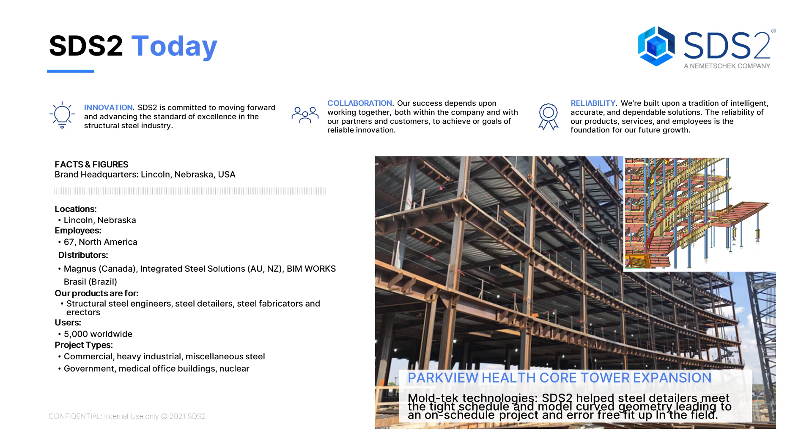Projects range from commercial to heavy industrial to miscellaneous steel. And you'll see that across government projects, medical office buildings, nuclear, churches, strip malls, and anything else your imagination can come up with. I feel like we've seen that come through on SDS2 projects that come through our solid steel competition.

One other thing I wanted to hit before we got into our webinar today is the ROI with SDS2. We recently did a survey of our customer base, and they brought back some pretty interesting details to us about how SDS2's impacted their business. Most of you have seen the ability to expand the capacity and take on more projects through your shops or through your detailing offices, or take on larger projects. Our customers also feel like they've got a competitive advantage when it comes to winning projects, which is great to see. And your customers as detailers and fabricators tend to be more satisfied with the quality and efficiency of your work. So I just wanted to share this with you guys so that you can see how SDS2 is helping bring more profitability to your bottom line.

Today, our webinar is going to focus on the Estimodeling and production workflows between SDS2 and Tekla EPM. What we work through will work with either our detailing product or our Estimodeling product. The Estimodeling product is really a use case for fabricators who maybe don't have a detailing license in-house, or are subbing out to detailers outside of their office, but want to do the Estimodeling workflow without needing a full detailing station. So the Estimodeling workflow can be facilitated by our Estimodeling product or by the detailing product. But when we get to the production workflows, you do need a detailing license to work through that. So with that, we'll jump into our Estimodeling workflow and product demonstration so you can see how this works start to finish between SDS2 and Tekla EPM.

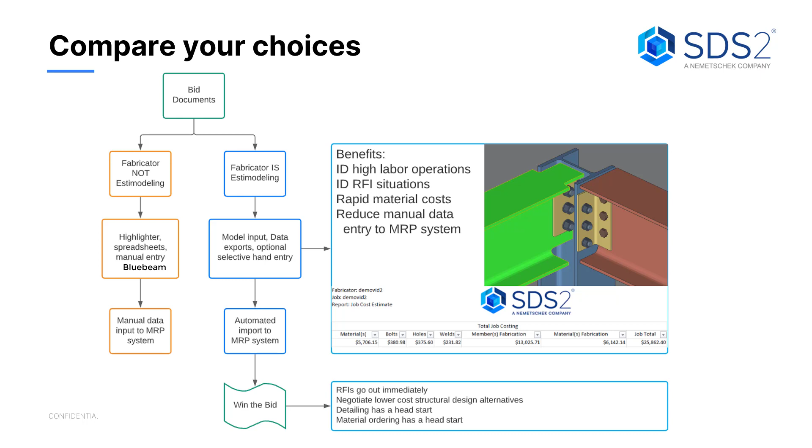So what that workflow looks like is importing a model or importing PDFs. If you import a PDF, you'll use that as a guide to trace members over on your different elevations and input columns and beams that way. From there, in SDS2, it's going to take care of the connection design automatically for you by designing realistic connections. The materials are going to get added as a part of that design, as will the cuts and copes and all the materials and welds.

From here, you can identify potential issues like looking for high labor situations, which could be non-square cut ends that maybe you can actually change to square cut ends to reduce some of that labor. It could be looking for web doublers or any other inefficiencies you might see in your model. And all this can be done fairly automatically within SDS2. There's no third-party software required here.

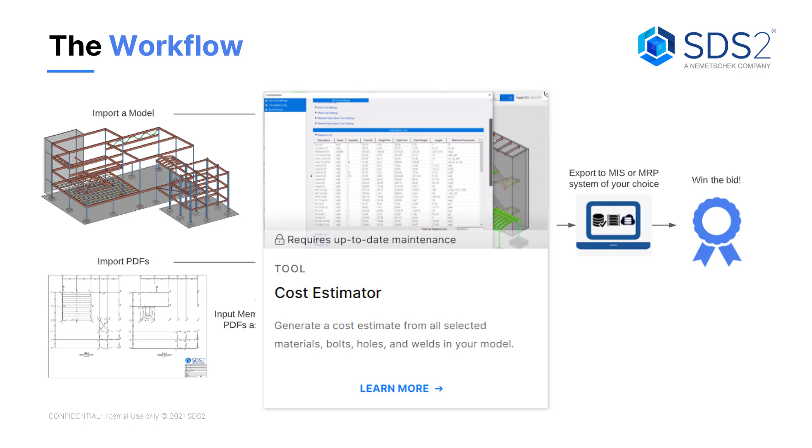Additionally, you can use a cost estimator to see what some of those designs can have impacts on costs. A good example would just be if you have the ability to design your connections however you want to, since it's not something that's spec'd out. You could compare bolted clip angles and maybe shear tabs and see what the difference is in those costs using the SDS2 cost estimator tool. This is found on the SDS2 toolbox page of our website, and as long as you're up to date with your maintenance or on a subscription, you can download that for free and add it into the software.

Once you get that information in SDS2 the way you want it, export that out to Tekla EPM or a similar MIS or MRP product, and hopefully you win the bid. That's the end goal of all this, to get you the most competitive, most accurate bid at the end of the day. So with that, now we'll jump into our demonstration of the workflow, showing modeling in SDS2 and then sending it over to Tekla EPM for managing the data and getting some of your costs.

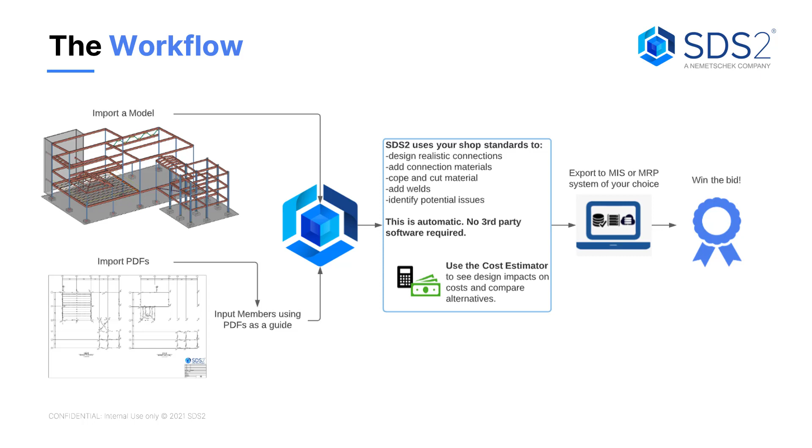To start out an Estimodeling workflow in SDS2, the modeler can either import an IFC, a CIS2 file, or a direct Revit transfer using the SDS2 round tripping tool. If you don't have that to start with, you can overlay a PDF into SDS2 and trace over it, as I'll be doing here. So I'm going to start off by adding in my columns.

You can see these show up in the 3D as I'm modeling them in my plan view. We'll put a rotation on these two as the plan calls out for, and I've turned those to solids. Now I'm going to change my elevation to 112 foot and switch my PDF to my first floor so we can see that I can trace in my beams. I'll lock in my elevations for my beams.

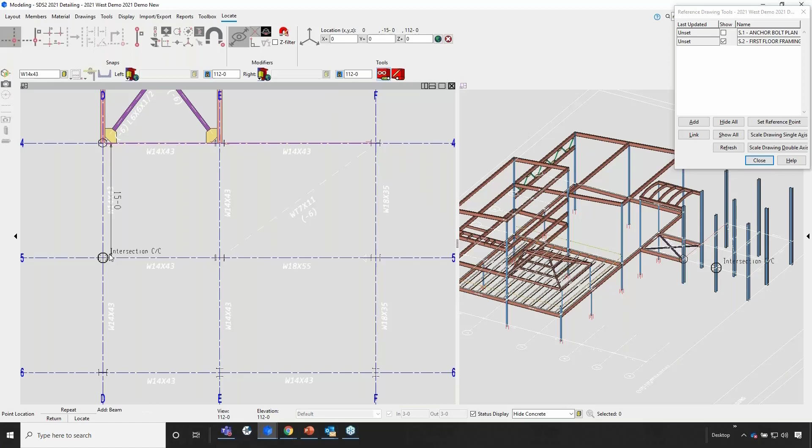And I can use the infinite add tool to just click and trace, making input very fast. I just turn that off to move and then turn it back on to continue.

Now I'm going to change my section size to an 18 by 55 for that location and 18 by 35s for the other two.

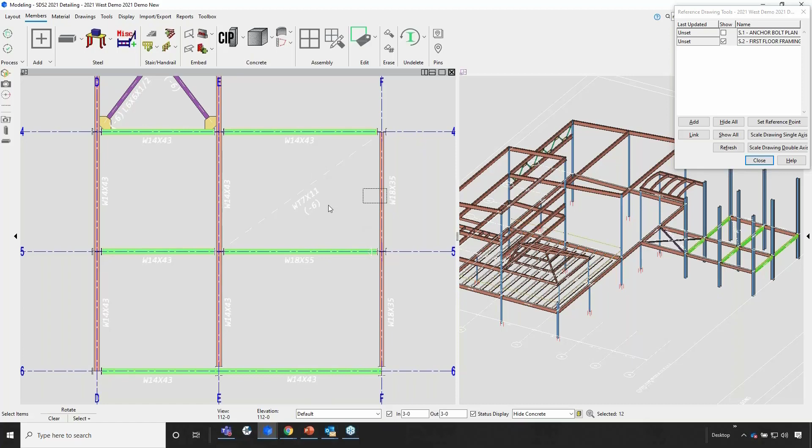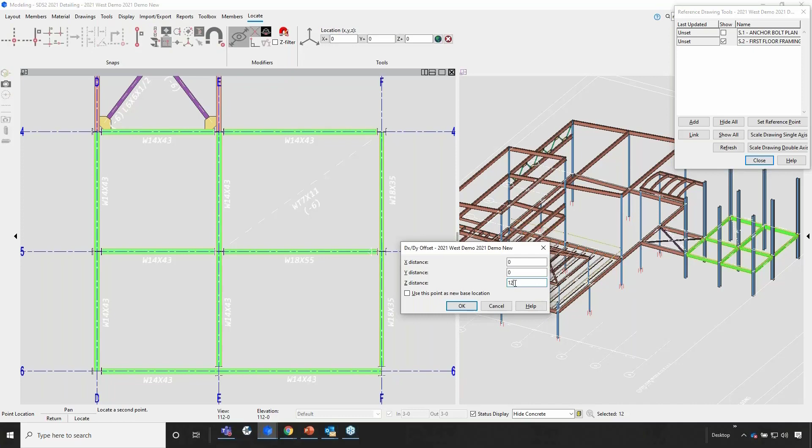And you can see I've got a level of beams input. I'm going to multi-select my beams and copy them up 2 more stories. So I'm going to do a copy. In this case, I'm going to do a single copy and intersection construction line for my first point, and DXDY offset for my second point, and that'll let me go up in the Z direction 12 foot. I'll do that and confirm it, and okay, and confirm one more time.

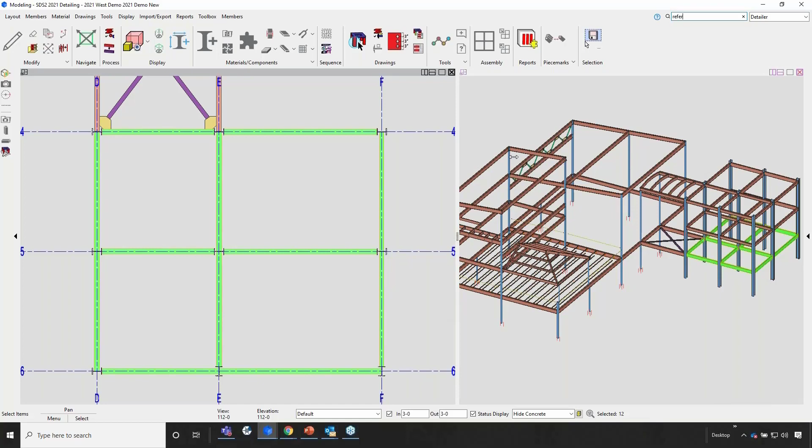So very quickly, I was able to add in 3 floors of steel there. And I'm going to clear and work in just one window view now. Turn off my depth check.

So you can see one of the advantages of using SDS2 in the estimating process is that it does place the connections on your model. So if you're a shop that does shear plate connections, this would be your defaults that you would come in.

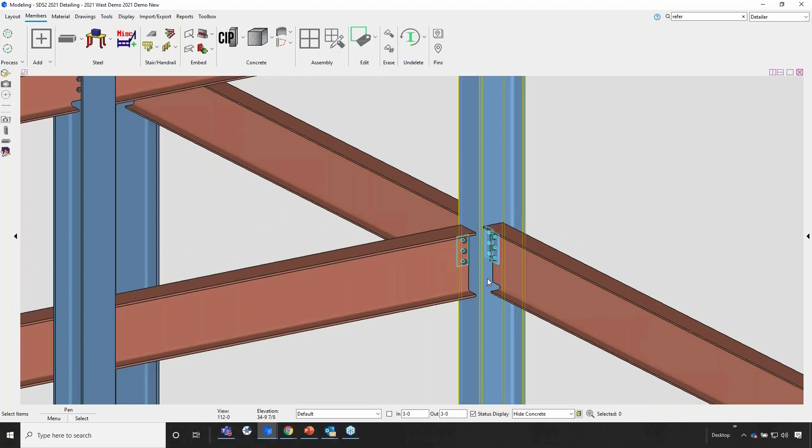So now that I've got this model, my next step is going to be to search for some items that might be high cost areas in my model.

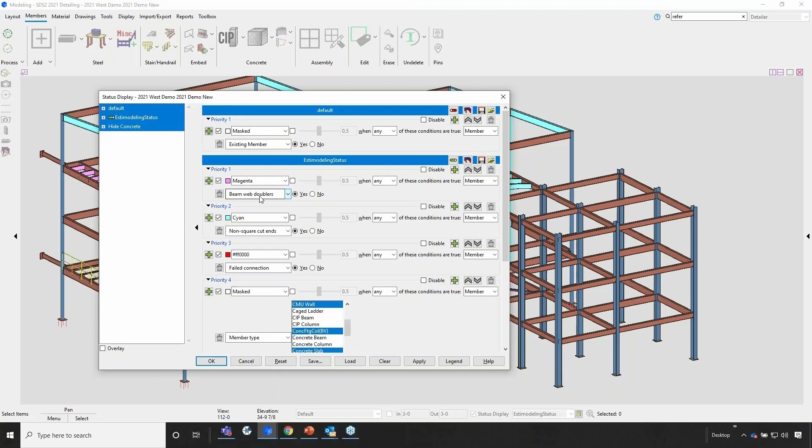So I have a status set up for this that will highlight certain items. What I'm searching for is beam web doublers, non-square cut ends, and any failed connections. Those are kind of the starting points for me.

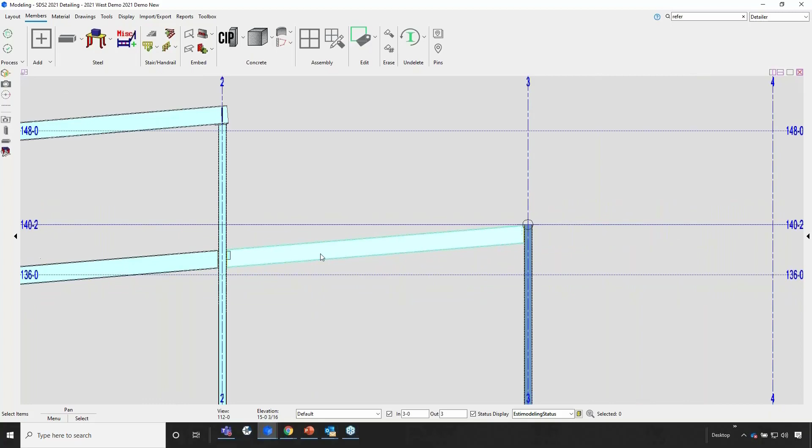So now we can see, okay, I've got some cyan colored items with non-square cut ends. If we take a look at them here in an elevation, you can see there's a pretty good slope that we're probably outside of the tolerance where you could square cut those ends feasibly. So those are okay, I'm fine with that.

Going to uncheck this. Let's take a look at these pink ones. Those were the web doublers. So those might be something that, okay, these are just short span. I'm going to select them, do a multi-edit, and take a look at the loading on it.

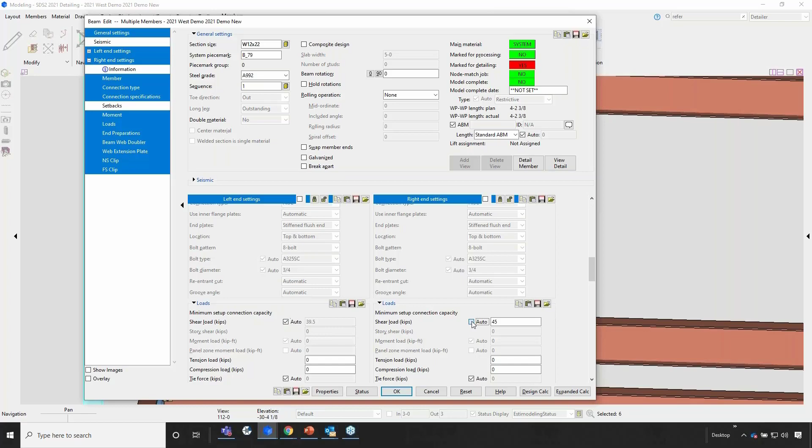So if I look at the loads, those are at 45. Let's drop those back to an auto, let the system handle them. You can see that takes that away. So we've got a little bit more reasonable connection there for the span that it's in. So those are some things that I can address within the model to help my bid get a little bit closer and make sure we're eliminating things that could be high costs in labor and materials.

The next thing I'm going to do is run our cost estimator tool. This allows me to get just kind of a quick idea of what the costs of the materials in the model are without taking it out anywhere yet.

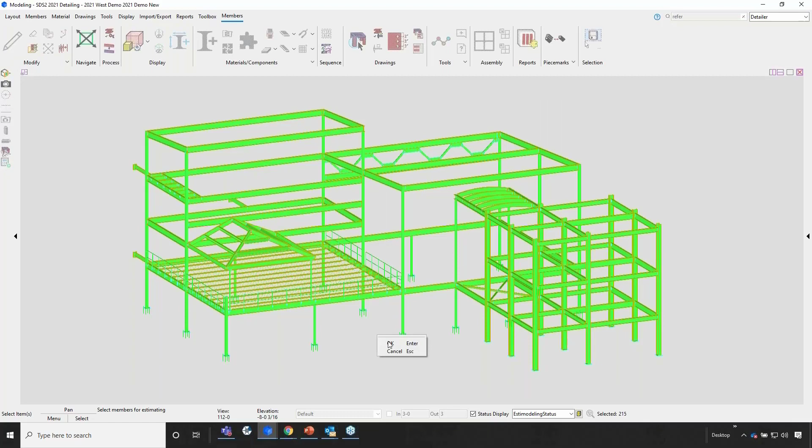So it will bring up, once that information comes up, I can get a quick glance at it. I can see, okay, my material costs are $58,128. My bolt costs are sitting at about $3,500, just underneath. My weld costs are around $4,000, and the hole cost there are showing just under $3,000.

Now I can run this to an Excel export. I'm going to do that the next time, so we'll cancel out for now.

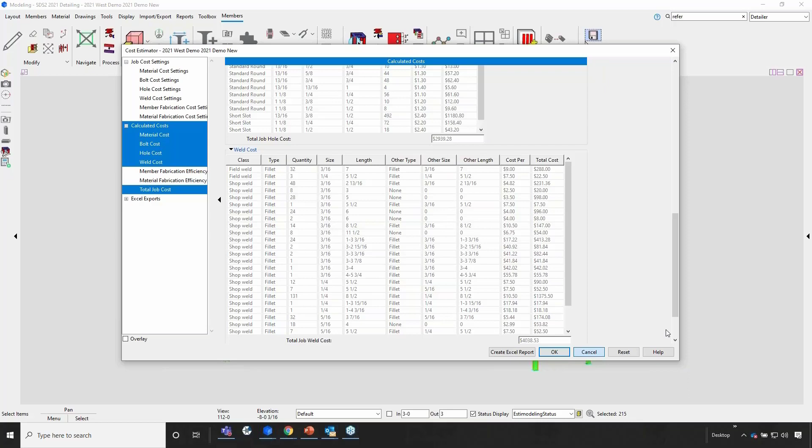But say maybe my shop doesn't do shear plate connections, maybe I'm a bolted shop. So what I'm going to do is make a quick change to my setup with the auto standard connections.

I'm going to change 3 things here. Most of this is wide flange, so we're going to do a wide flange beam to a wide flange beam. And going into the web perpendicular, I'm going to change that from a shear plate to a clip angle, and maybe I want it bolted.

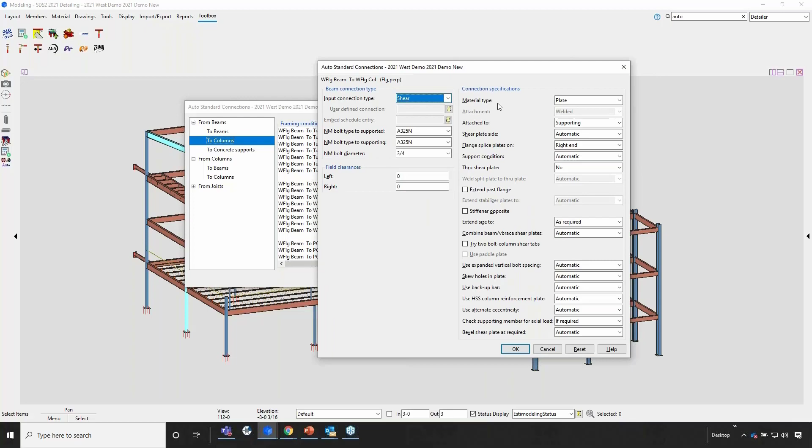Then we're going to go from beam to columns, same thing. I'm going to go into the web perpendicular, I'm going to make that a clip angle, make it bolted. Hit OK there. And into the flange perpendicular, we'll make that one also a clip angle, bolted.

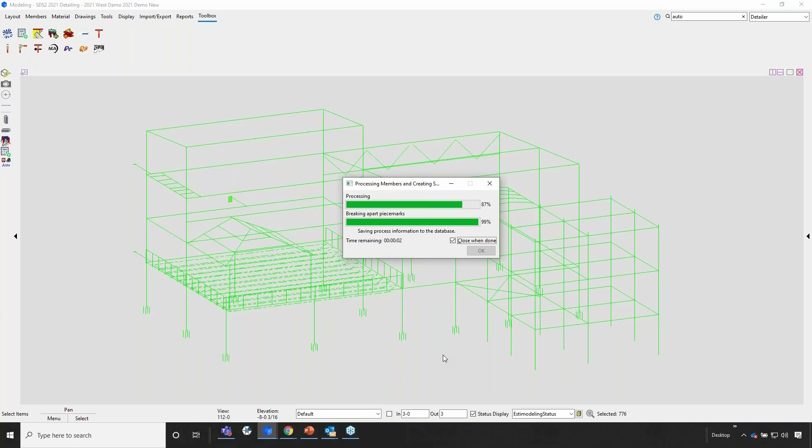Once I've done that, I'm going to reprocess this and let the system run through connection design to change everything to bolted clip angle connections where it can. So now that that's processed, you can see we still have our members that are sloping with the non-square cut ends. But if we come in here and take a look at these connections, you can see we've got bolted connections. So that's a very quick and easy way to adjust an entire model in a few seconds.

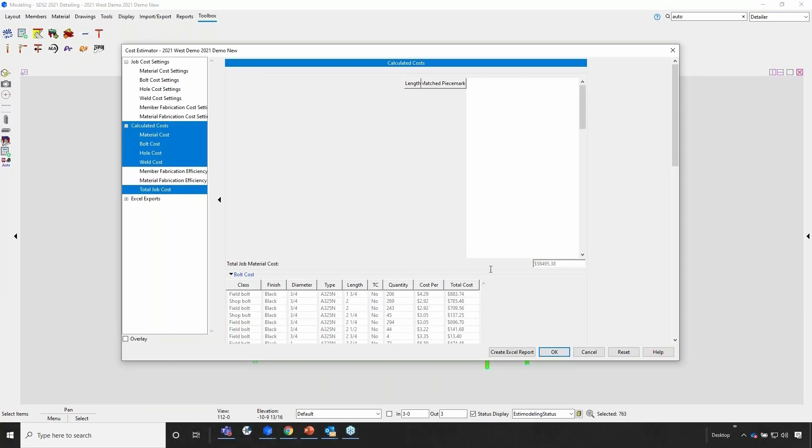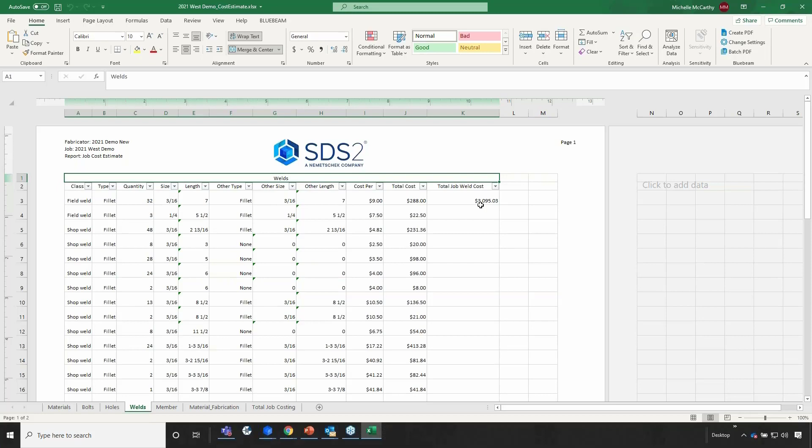We'll run that cost estimator tool one more time. Except this time, instead of looking at it here, we'll create the Excel report, and we can see our material costs. Our bolts went up to 4,500, holes were about 4,000, and the welds are 3,000. So we can see that the shear plate connections might still be more economical than what we had in the first place. It gives you a really good spot check on how you want to have those connections designed to be most efficient for you.

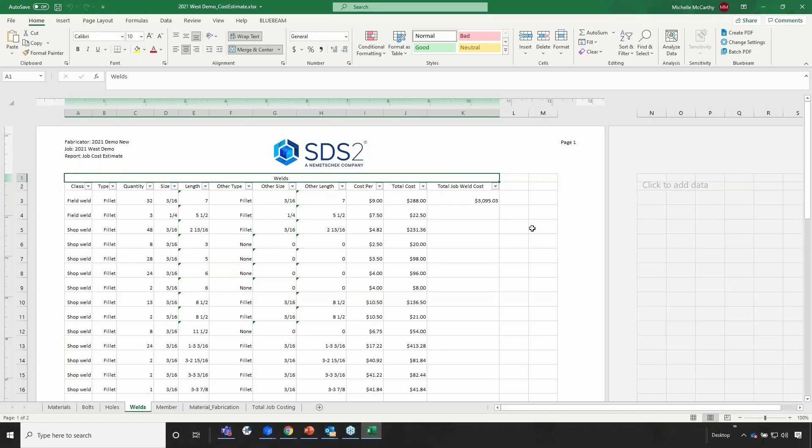Now, you might make up this cost in labor for erecting it in the field by having it bolted. So it really comes down to your preference, but you can get a very fast comparison with SDS2 in the Estimodeling workflow. So maybe I want to change back to auto standard connections to make those shear plates again.

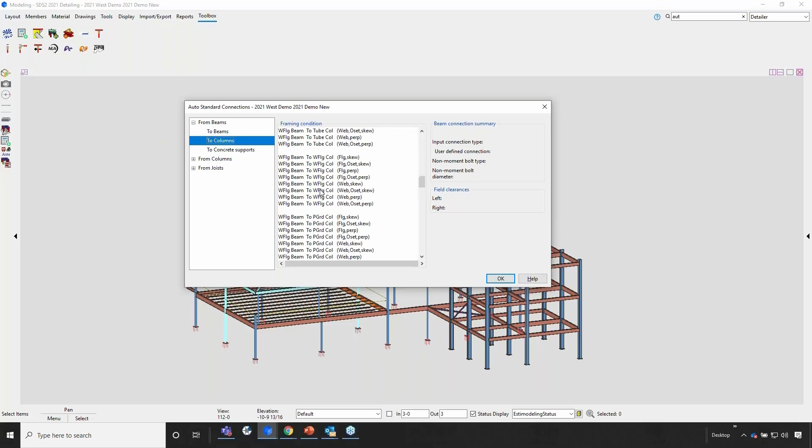So I'll make those same changes. Shear plate. Run it back. So now we have our shear plate connections.

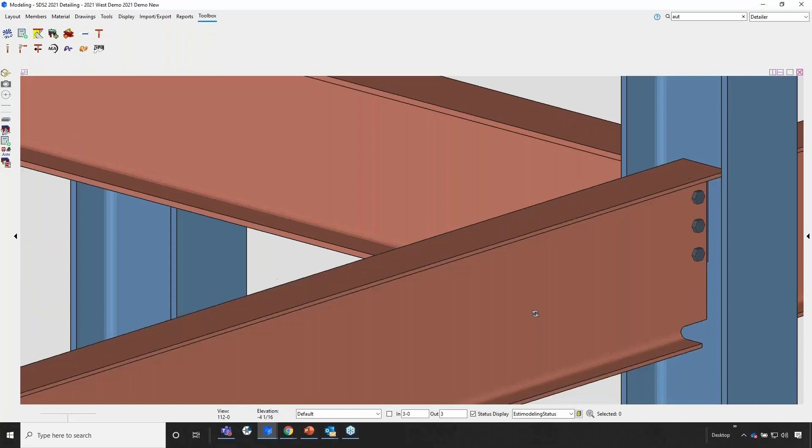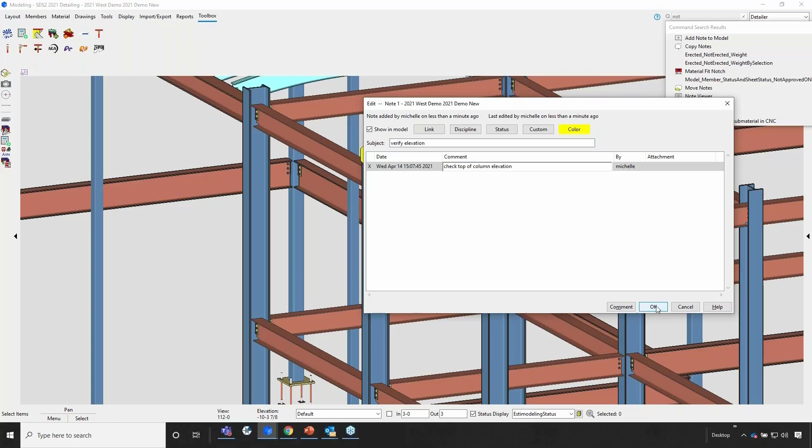If there's any areas that you want to pre-identify with RFIs—maybe these column tops look funny—we can add a model note, and I'll throw a comment in here. That way, if you do get awarded the project, you're ready to send off RFIs, and that'll show a note in your model so you know where those are located. It just helps keep you organized.

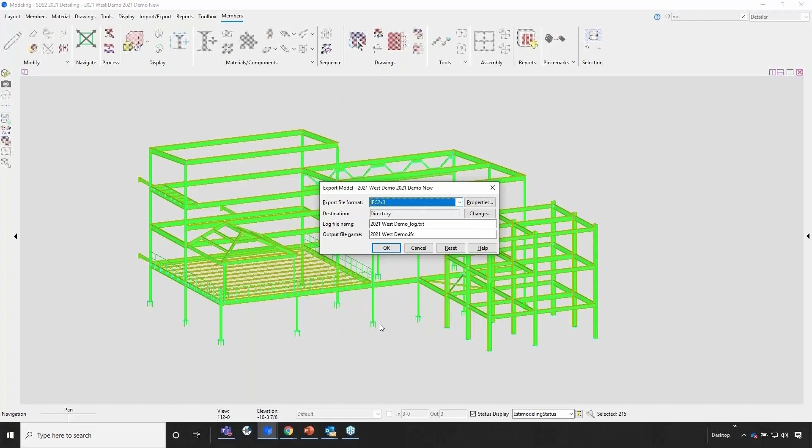At this point, we're ready to send this off to Tekla EPM, so what we'll do is export an IFC file. We can do it by selection, or you can do it from our main menu. You're going to want to make sure that you export welds, bolts, and holes so that you get all the information about how you're going to fabricate this, because it is an estimate, right? So you need to have that information. So we'll hit OK and export our model.

At this point, we'll allow Tekla EPM to take that in and show you their side of the workflow.

In case you haven't met, I'd like to introduce you to Tekla Powerfab. It's actually a suite of tools designed for structural steel fabricators—a complete steel fabrication management system. The foundation of Powerfab is Tekla EPM, which stands for Estimation and Production Management. It's a tool for estimating, for material optimization and inventory, project management, and production management.

Trimble Connect is for project-based communication. You may know it as a model viewer, but it's really much more. Connect is a tool for real-time, anywhere visualization and collaboration for everyone involved in a project.

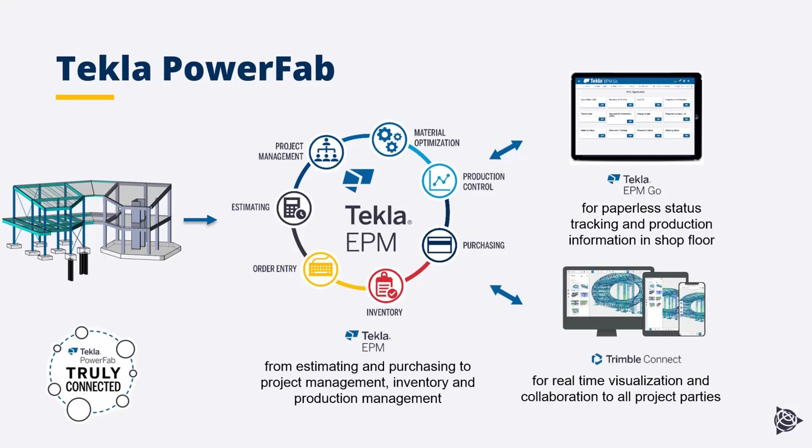Tekla EPM Go is for real-time status and paperless shop floor operations. EPM Go is a web interface, so it works from any web-capable device to update production status from the shop, erection status from the field, or to view overall production status with our new dashboard feature. All of these together provide unprecedented transparency and real-time access to project and production information for better decision making, regardless of the device.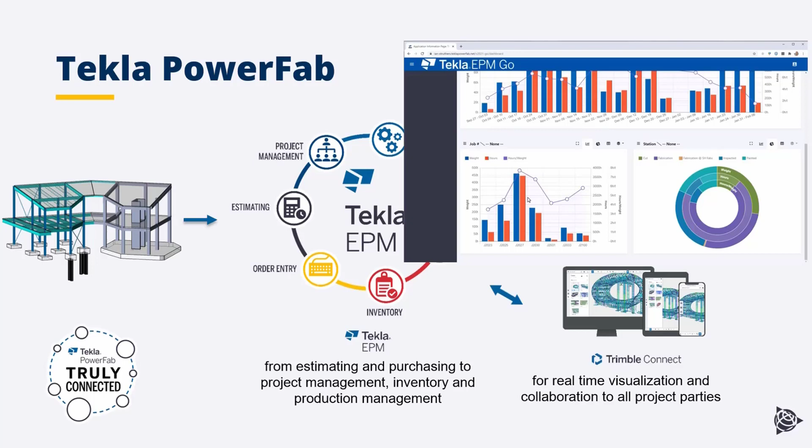Tekla EPM and Powerfab are an open solution with compatibility across the industry. We integrate with most of the equipment and software you're going to find in any fabrication shop.

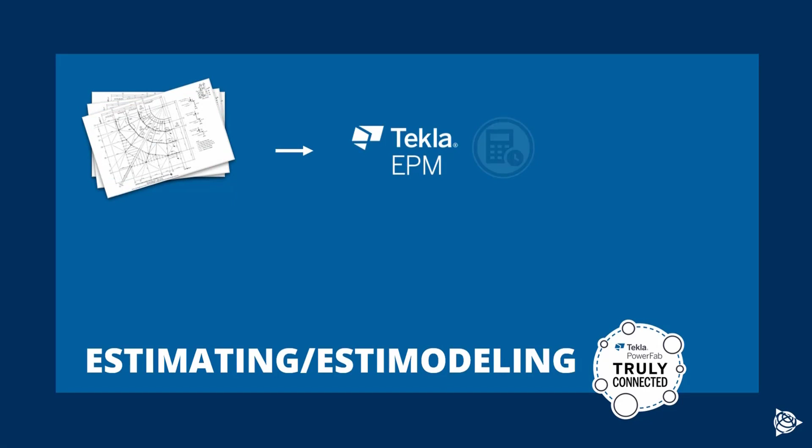Before I bring in that IFC from Michelle, let's take a satellite view of workflow possibilities for an estimate. EPM is a powerful tool for the estimator—kind of an adjustable multi-tool that can work with you and your workflow. Tekla EPM has an easy-to-use and intuitive process to do a traditional takeoff, where you input assembly and material data into the estimating module, apply labor codes, and output a bid.

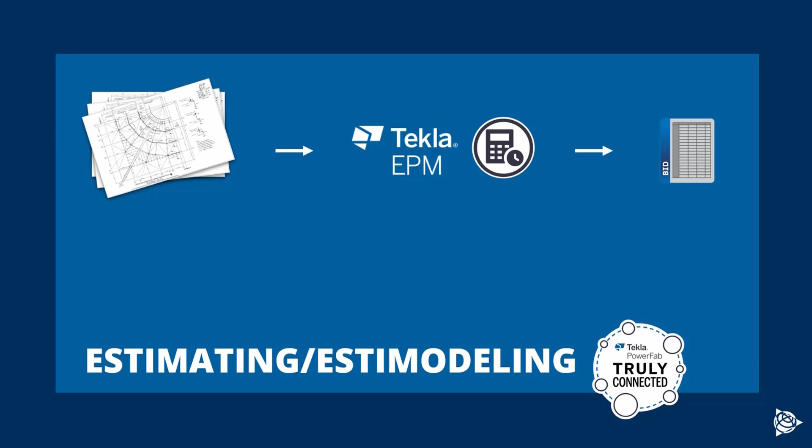What we're going to look at is the Estimodeling workflow. It's based on inputting the data, as Michelle has demonstrated, directly into the 3D model space, rather than into the estimating interface. The more accurate you make the model, the more accurate your estimate's going to be.

We could start with a stick model, maybe an IFC from the Revit design model, and then use labor codes in EPM. But really, if you want the most accurate results, an IFC generated from the detailing software is the way to go—it's just more information. That IFC can include welds, holes, cope information. It's just more specific and more accurate data on the labor that's going to be required than merely relying on labor codes.

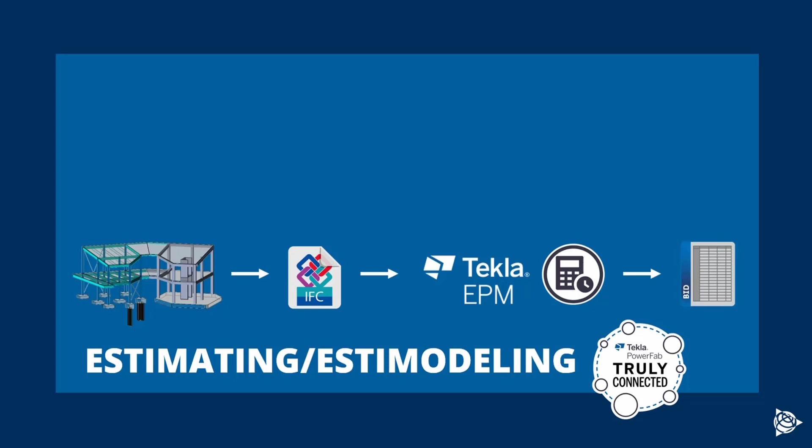Just so you know I'm not blowing smoke, here's a quote from one of our clients, Adam Norman at GMF, from an article I highly recommend you Google. It's in Informed Infrastructure magazine, called Increasing Profits and Winning More Work. Adam says, we used to bid a project every 10 days, now we're bidding 3 projects each week. Estimodeling has not only increased the accuracy of our estimates, it's also accelerated our workflow, which allows us to bid more projects. I don't know of a better way to illustrate how doing the estimodeling process can really make your estimating more productive.

Now I'm going to bring that IFC into estimating. I'll do an import. As we import the IFC, we have some setup options for the project that will affect the man hours and other job costs. We have paint systems and clean systems that can be applied, as well as other settings that will affect the final bid.

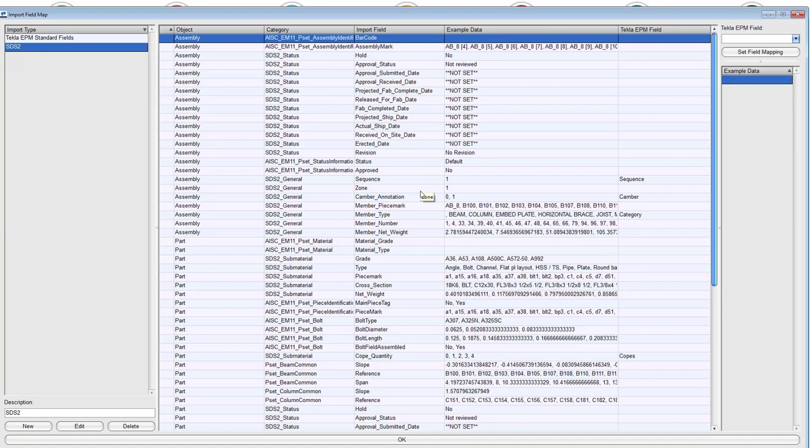And during the import, EPM will ask you if you want to create a Trimble Connect project, and will ask if you want to upload the IFC. So it's a pretty easy and efficient way to get that Trimble Connect project with the model created and linked to the estimate.

Now we'll take a look at our estimating job. Everything you see here was just brought in from the IFC. The M designates our main material. Any connection materials like clip angles, shear plates - whatever was in the model is included as submaterial. Bolts are included. Notice in additional labor at the bottom right, the hole operations and welds required have been added.

And since I mapped cambers and copes, those are also included.

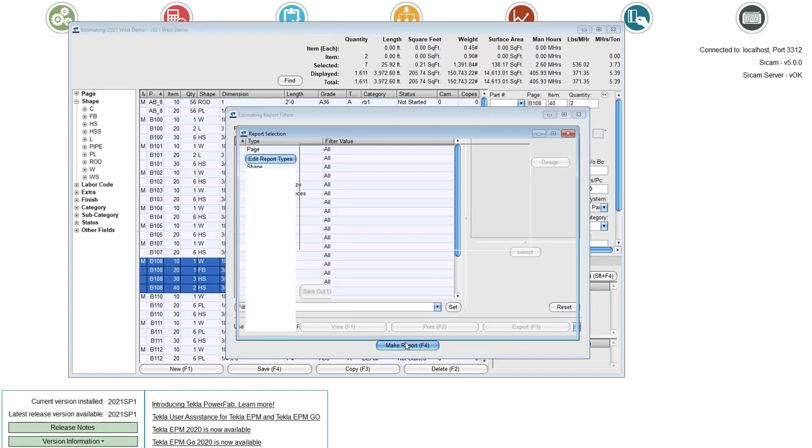Tekla EPM also includes reports to summarize details on labor, material details, and to generate detailed estimate reports for your bid.

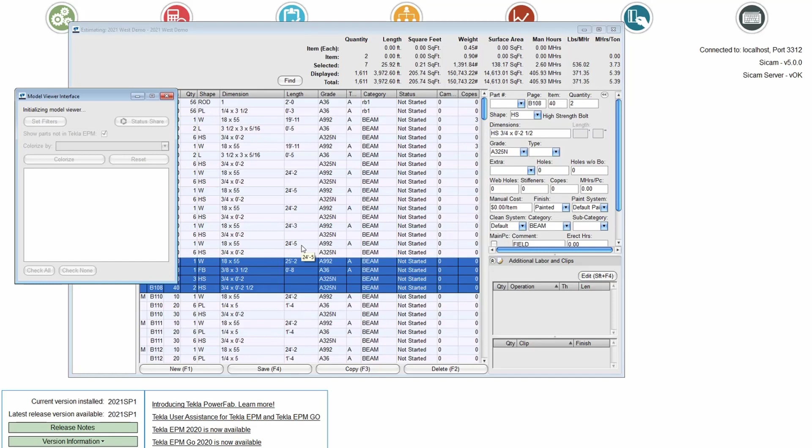Now back in Tekla EPM, let's take a look at the model interface that's launched from the estimate screen. This opens the model in Trimble Connect Desktop, which provides a nice, accurate view of the model, including bolts, holes, and welds.

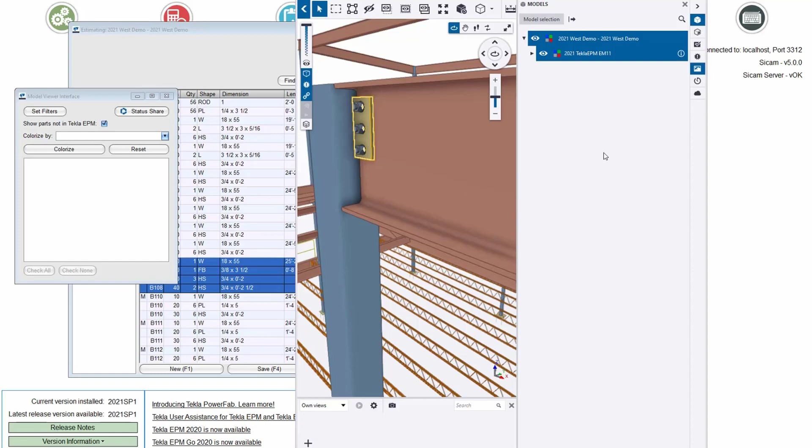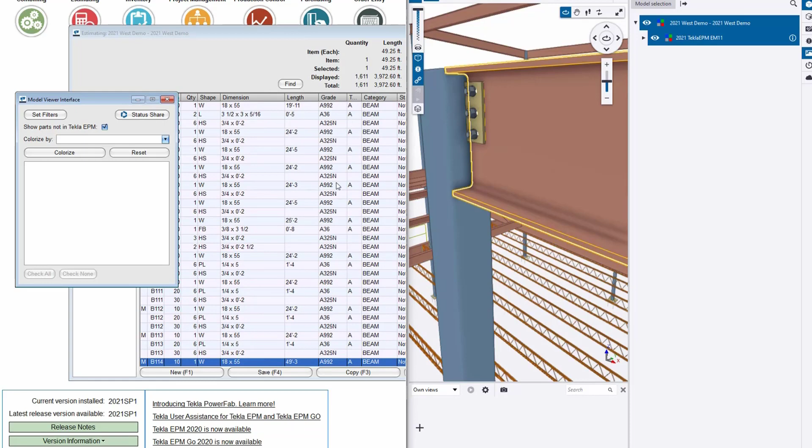What's really powerful here is the link between Tekla EPM and the model. I can select a material in the model, and in EPM, I can select from model. I can do the same thing with multiple items. And I can use that to quickly find that material, to review the labor, and verify that Tekla EPM calculations match up to what I see in the model.

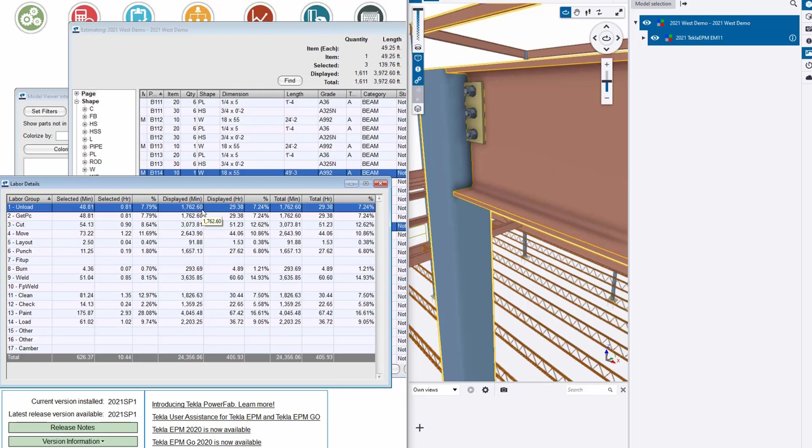Likewise, I can make selections in EPM and have those assemblies or materials selected in the model, and I can isolate that selection to get a better look.

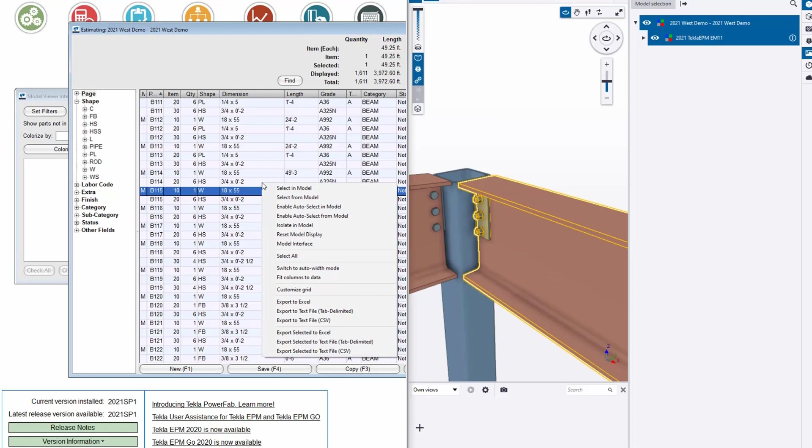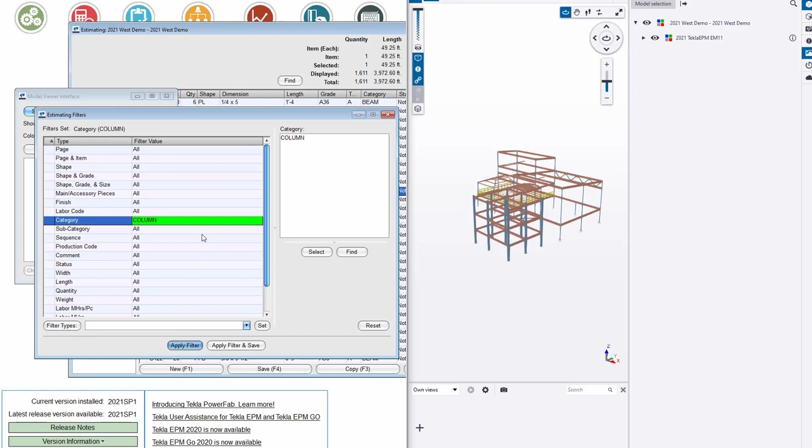Also with the model interface, I can set filters. So I could view, say, by a specific category if I just want to see columns. And I can colorize by status like category, subcategory, sequence, labor codes, production codes, etc.

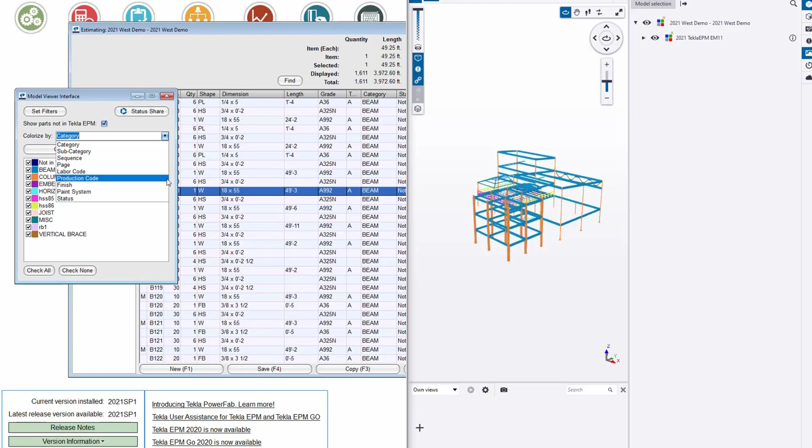All right, so now let's take a look at the production workflow, and we'll hand this over to Jonathan Henricksen to give us some information about how they're doing this in a real life situation.

Thanks, Michelle. So as we onboarded with Tekla EPM or Fab Suite and that generation, we wanted to find, and we needed to find, a way to better communicate what's happening. Our detailers have an incredible understanding of what's happening on any given project because of the time that's spent with a model. The model becomes a key component in generating the information that we use to populate the Tekla EPM database and be able to manage production and understand what's happening in our shop.

So we've spent time evaluating and looking at the workflow to take data from SDS2 to Tekla EPM, really to streamline that flow of information through the organization, throughout all of our fabrication process.

We as a company have leveraged a fair amount of technology. We've become paperless in the shop. We use Tekla EPM to understand what's happening for reporting, production, and piece tracking. We also use barcoding, and having that real-time feedback information is incredibly helpful to know where we're at.

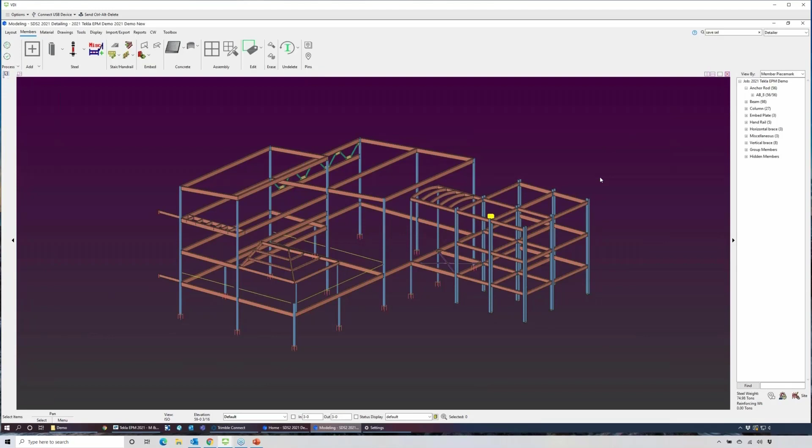To start, when we're looking to pull information or we're releasing something for production, we start with our SDS2 model. It's nice to include everything that we possibly can in that model—slabs, footings, walls, etc.—so that you have not only the actual steel information that we're going to work with, but also reference information to show what the ultimate structure, the ultimate building, is going to look like, and how the steel we're working with fits into that as an entire system.

We use the first component that we pull out as a data export to do a full project export, which is done through status sharing. So we're exporting via the status share tool.

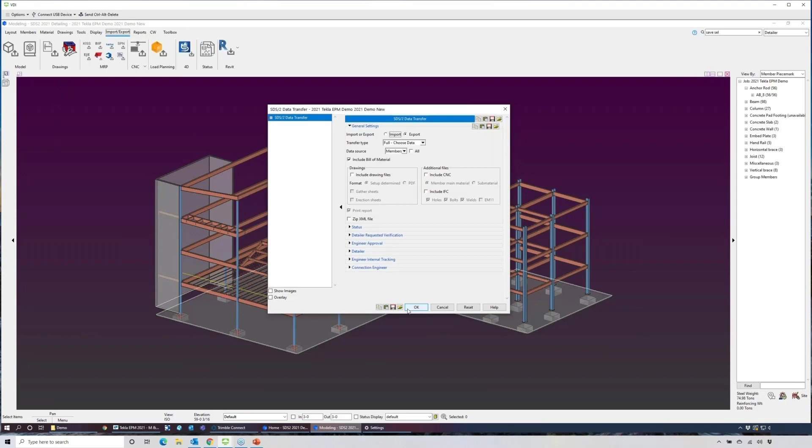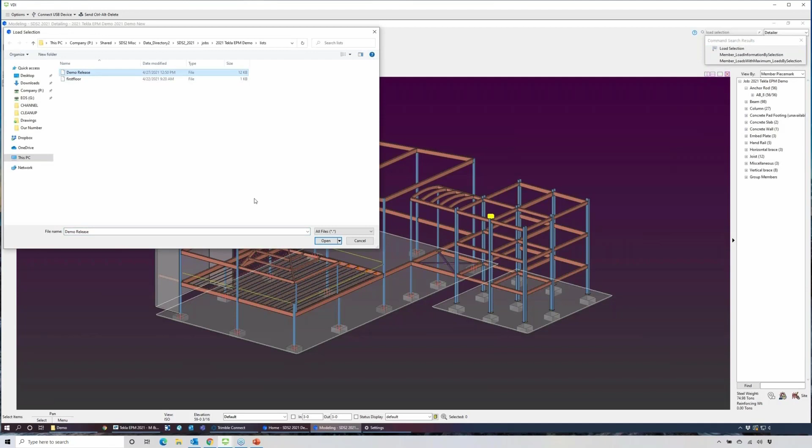Another tool that is really helpful in making this process efficient, especially because we're going to use multiple data exports to transfer the information, is to utilize the load selection tool. I've done this as kind of a setup to get us moving along here. We create and save a selection of everything that we want to export, based on what is actually to be released at that point. So we grab that selection, run our status export, and generate an XML file.

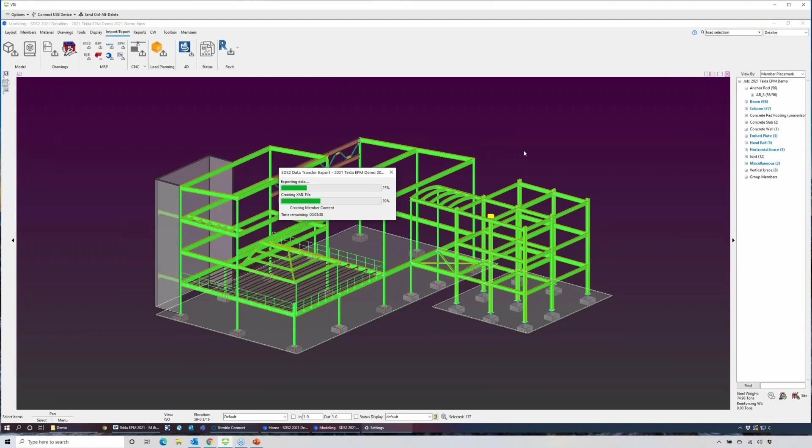Beyond the status share, we also pull an IFC model from what we're looking at in the detailing system. When we're pulling the IFC model, instead of pulling just the information specific to be released, we'll pull all of the data so that we can have the same level of information that the detailers are looking at available to everybody else on our team.

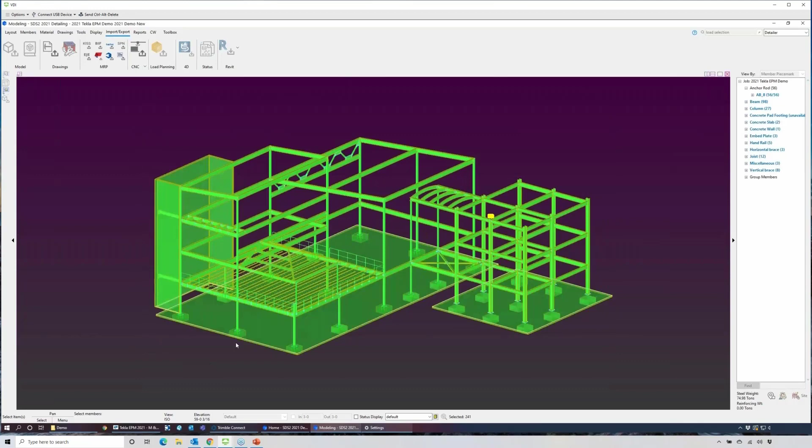Including bolts, holes, and welds gives us a fairly feature-rich model that we can work with to better communicate what's happening throughout all of the processes involved.

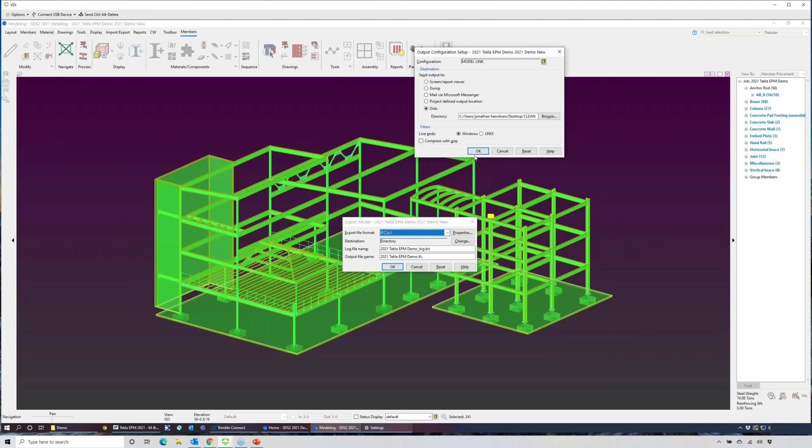Finally, beyond those first two exports, we export individual sheet PDFs for pulling into Tekla EPM. We pull a KISS file to help with cleanup of data, and we pull all of our CNC. That way, everything that we're working with gets pushed into EPM production control to be able to be used by the rest of our team to manage all of production.

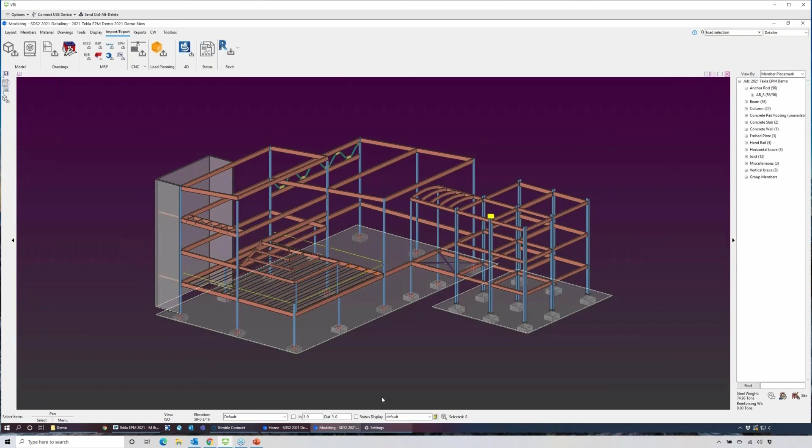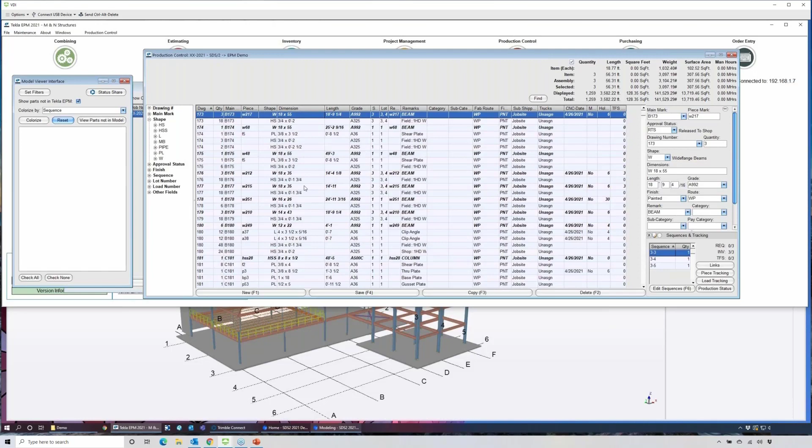Once we pull the information into Tekla EPM production control, we do a little bit of cleanup work on it, adding things like lot numbers and fab routing, shipping routing, making sure that we have CNC for all of the files that we need to work with so that we can program and plan out the work that's happening in the shop. At the same time, we pull into Trimble Connect that IFC model so that we have a visual of what the project is going to look like.

As you can see, it's a very clear representation of what was in SDS2 without the SDS2 user knowledge in order to be able to see and manipulate the data.

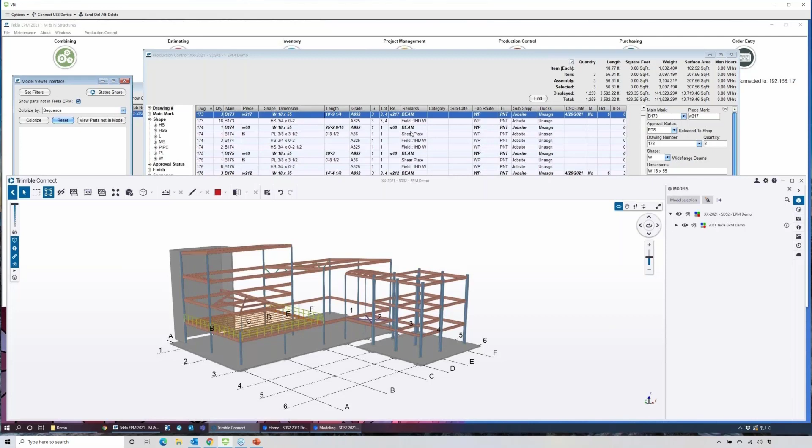Another big component, as we were talking about, is highlighting and understanding what's happening in terms of production so that we can have this data available. EPM has a model viewer interface that allows us to identify and colorize, or color code, what's happening in that model based on several different factors of what that data is.

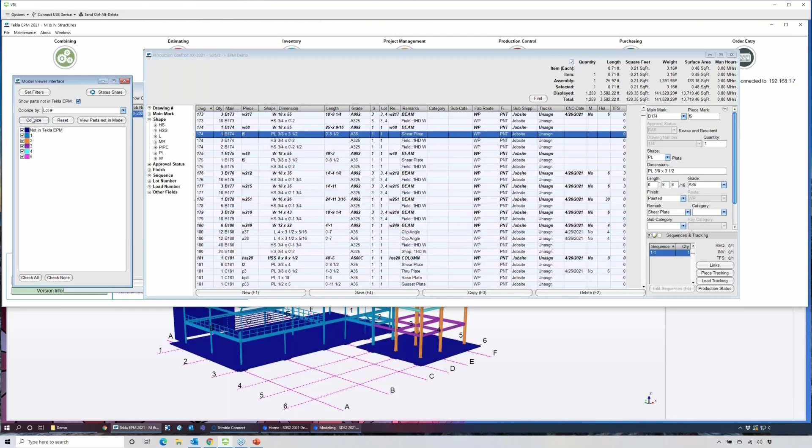For example, we can colorize by sequence and identify clearly and visually, in real time, what the different sequencing is. I mentioned that we update lot numbers. So for example, I've lotted out this model to show different phases of building this tower off here to the right-hand side.

As data is pushed from production control into purchasing, into requisitions and purchase orders, and received, we're also able to track all of this information as to where the material status is. So material location status, for example, will show us color-coded instantaneously what material has been released, what material has not been released or not been moved beyond production control. That's the items that are not linked. What's still in a requisition or hasn't been purchased yet. What's in inventory or has been purchased but maybe hasn't been received. And then different color codes for where each item or each raw material piece is at in our yard or in our stock.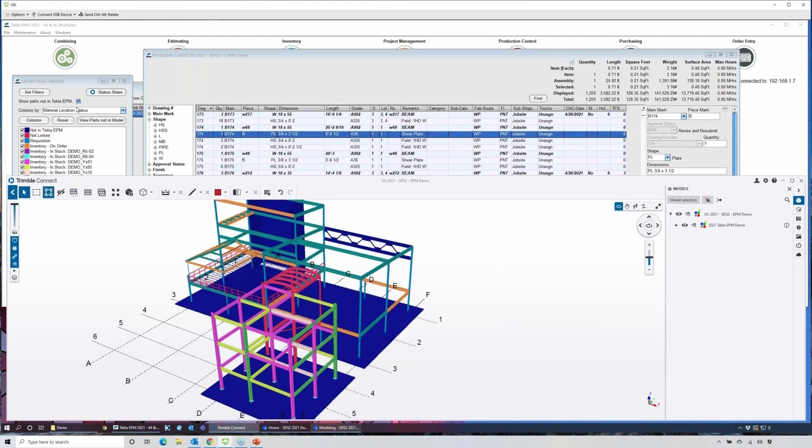Two other items to highlight on this. There's this dark blue color that shows up in many of these options. That's information that is not in Tekla EPM. This is the reason why we export the entire model. It's a quick error-checking way to see something that may or may not have been missed in the data export. For example, this big truss back here is showing up in that dark blue color. It's not actually in Tekla EPM. Now it's time to call a detailer and find out why not. Did something get missed in how they exported it, or was it not really ready to be released at that point in time?

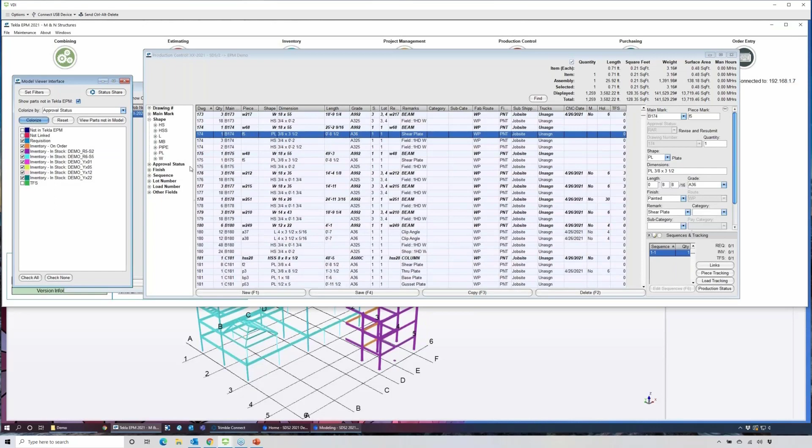Using the model interface, we can also turn off different sections of this to more clearly highlight where maybe we have all of the material that we need in order to begin a production sequence. Other areas that we can highlight: approval status, to track what's been released, what's not been released, where things are at in the approval process.

Finishes: what material is galvanized, what material is painted, for example. Some of this stuff is information that I quickly threw into Tekla EPM to be able to highlight what some of these quick options are.

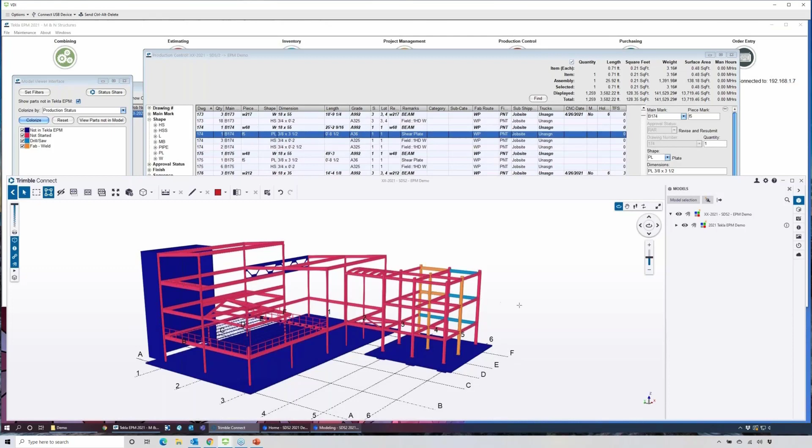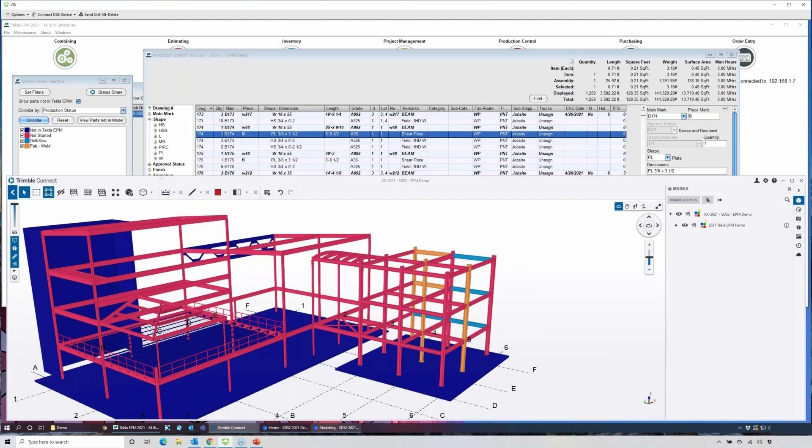And then finally, we're able to use this, and really a big component of this is being able to identify what's actually happening in production. So items that are shown in red in this display are items that are not started yet; we haven't begun fabrication processes. The light blue color is material that's been pushed through the beam line that we have in the shop. The orange is through the next fab station. All of this color coding is updated in real time into the Trimble Connect model and into the Tekla EPM database. So as a piece gets scanned through one fabrication station, if you simply recolorize the model, you'll see updates as to what's actually happening in real time.

Finally, we can track shipping status and field status if you've got information coming back from the erector on the job site, to identify what has been erected and how you want to track those different processes.

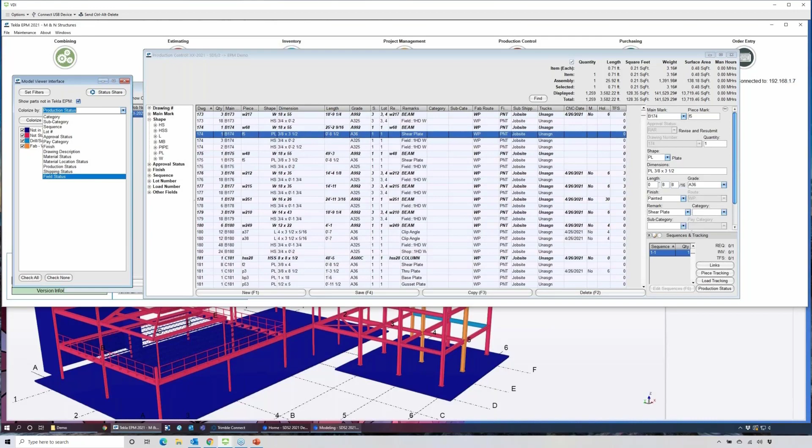Some best practices in terms of how to make this workflow really function and thrive in our organization. Number one, model integrity is critical. The data flows from the SDS2 model. XML files, IFC files, CNC files are all model based, and they need to reflect what's actually in that detailing model. The model also becomes that unifying communication tool and needs to accurately reflect work that's happening in the shop.

Additional data points are added to the model-based data as supplements, not as replacements. As we're adding data like fabrication routes and piece tracking, that's information that can be pushed around into other systems in our shop, and eventually pushed back into SDS2. It has to be done on the same graphical item in the model, because it's all tied together using GUIDs, and that's the way these systems all communicate with each other.

Boneyards of storing material off to the side are really not a helpful communication tool. The model needs to be accurate, clean, and everything needs to be modeled in position for where it's actually going to be used in the structure. Otherwise, it's just ancillary information that a PM or a fabricator or a guy in the shop doesn't understand, and we end up calling or pulling a detailer in to understand what that component is going to be used for.